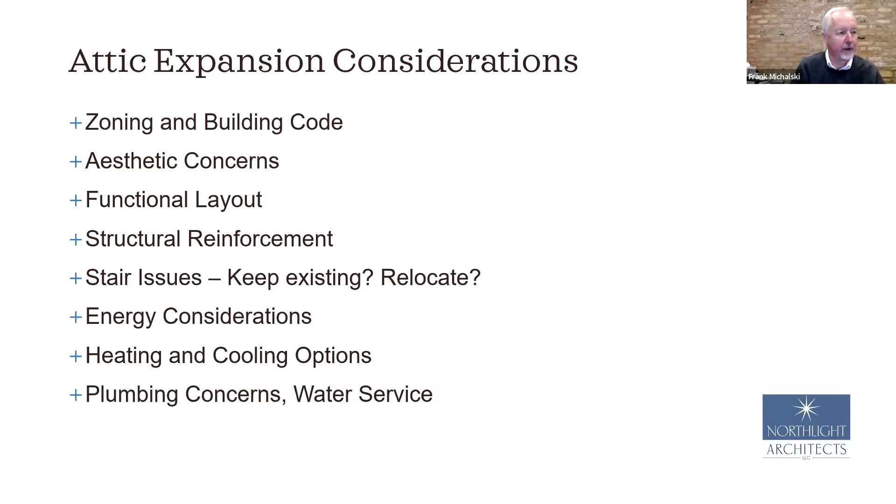So I'll get started with the zoning and building code. The way the city is set up is every lot and neighborhood is organized under a zoning district. Usually the bungalows are in RS3, RS2, sometimes RS1 district. And the districts have different requirements for the bulk, for how tall a building can be, how large it can be, side setbacks, etc., along with other considerations. But those are some of the things we're going to be looking at.

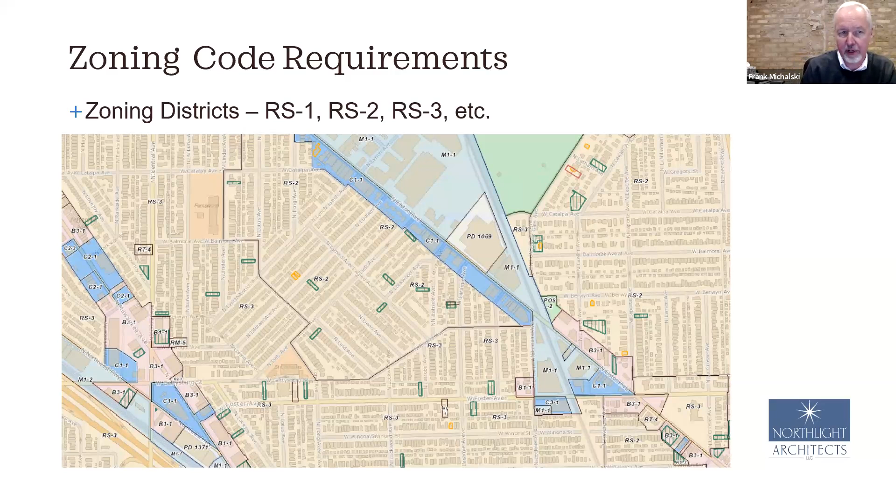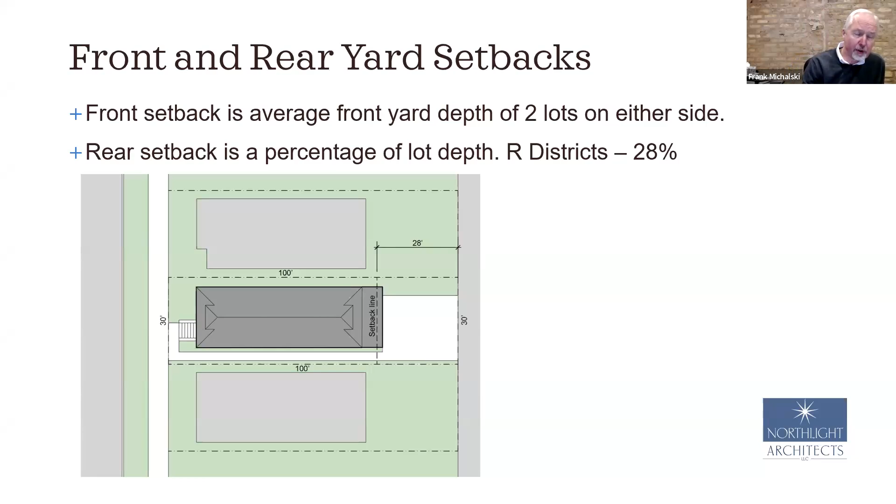Front setback, rear setback, side setbacks, that's also a ratio of the lot width and where the property lines are. There are kind of two limitations: one is the total side yard setback, and in an RS2 it's 30%, which was where this project is. And then there's also a minimum side yard setback that has to be adhered to.

And sometimes the existing bungalow that I'm working on is already existing non-conforming, already encroaching into those side yard setbacks. So either the addition has to be in from the exterior walls, or else we apply for a zoning relief, usually through the administrative adjustment process.

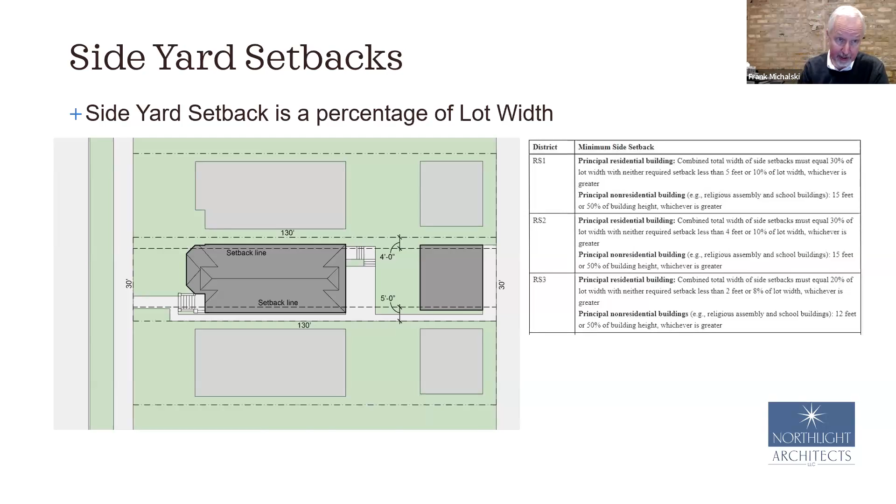Then there is what we architects refer to as FAR, floor area ratio. This is a percentage of your lot size. And again, I've got the chart on the three main zoning districts where the bungalows usually are. So the lower the district, the less amount you can build.

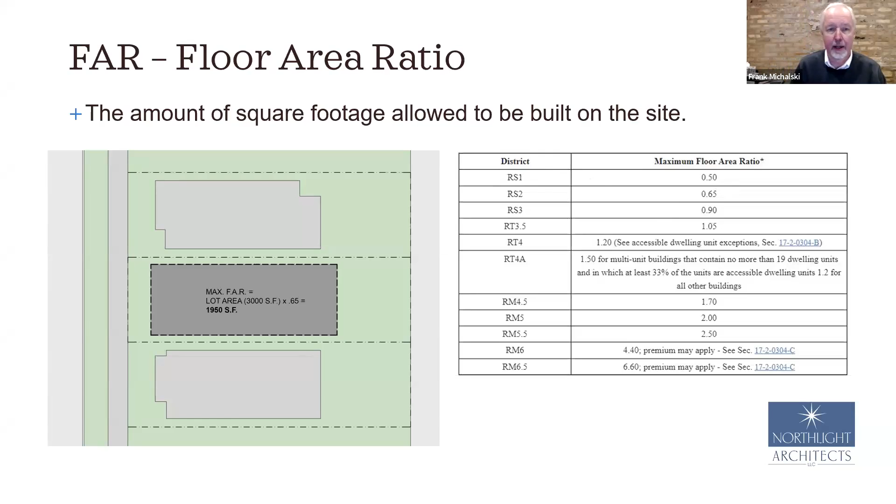However, usually in RS1 district, the lots are a larger size, but RS3 is 90%, RS2 is 65%. So that's another factor that can limit the size of the bungalow.

Just a little explanation of what counts in the floor area ratio. The square footage of the basement counts if more than 50% is above grade. So if the basement is more out of the ground than in it, it counts in the square footage, and it counts against you if you're trying to do a second floor addition and maximize your square footage. If it's more below grade, then it doesn't count.

If the ceiling height is 6'9" or less, it also doesn't count. And in attics, the only square footage that counts is where the ceiling height is 6'9" or more. So this extra space that you have, kind of your knee wall space, does not count in that floor area ratio. Just in case you're in a situation where you're in an RS1, you want to do a certain size addition, and you look at all these different factors which tell you how large it can be.

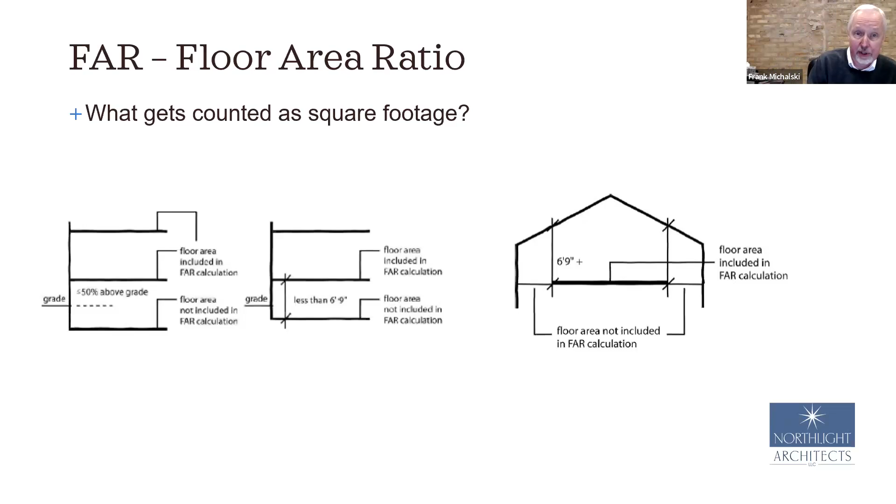Aside from the zoning code, which is one book, there is the building code, which was revised in 2019. This also has some limitations on building height and building area, though I find the zoning code usually controls that most. The building code deals with many things, but one of the important ones is the fire resistive requirements.

When a second floor addition is built, in this drawing on the left - I don't know how many of you can really understand this - this is like a cross section through the second floor addition, what we architects call the wall assembly. The wall construction has to meet a certain fire rating by a UL standard.

So this Table 601 tells us that if it's a 5A, which is like a typical wood frame construction, the exterior walls have to be 1 hour, the roof has to be 1 hour, with some exceptions. If it's 3A or B, which is usually a brick wall, these are the fire ratings for that. So when you're constructing your addition, you have to adhere to and meet these fire ratings.

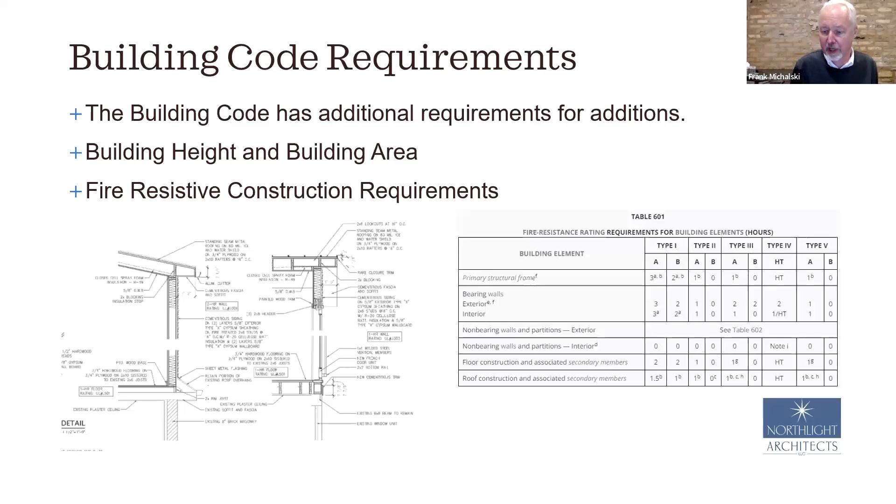Another thing that determines this fire rating or construction is how far the wall is away from the property line, and that is called the fire separation distance in the code. If it is less than 3 feet from the property line - so if you're building a second floor addition that is maybe 2.5 feet from the side property line - then that wall has to have a 2-hour rating. That means extra fire rated gypsum board or extra sheathing on the outside.

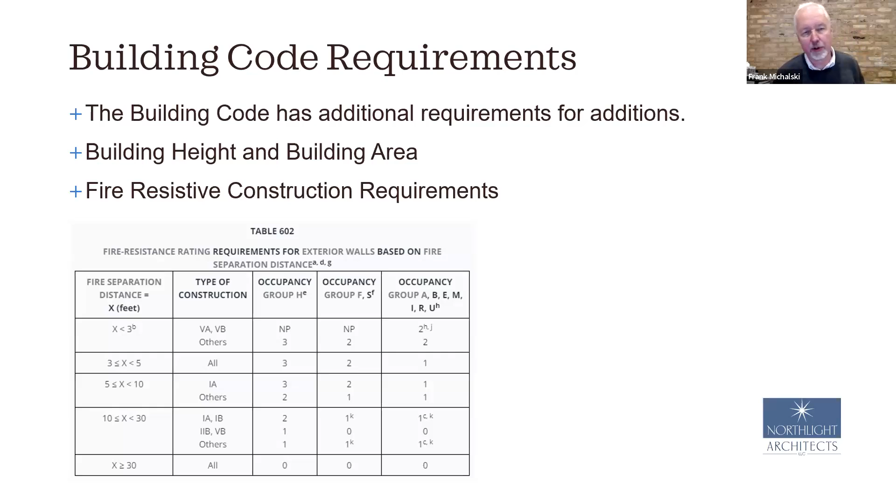And if it's within 3 and 5 feet, it's 1 hour. So all these code requirements all kind of happen at the same time, so as an architect, you have to look at them all and see which one controls your situation.

A part of the revised building code in 2019 had to do with the square footage of windows allowed. This was more in line with the international building code, which Chicago now is more aligned with. The international building code is more a national code.

So if, again, you're building maybe a second floor addition, and it just so happens that your existing building is less than 2 feet from your side property line, you can't have any windows. So if you wanted to have a bedroom here or something, you would maybe have to add operable skylights.

If it's between 2 feet and 3 feet, the code allows only 5% of windows, so it's not very much, but at least there would be some light and ventilation. If you are 3 feet or more from the side property line, which is more usual, you're allowed more square footage of windows, 25%. These two upper cases just occur sometimes in more hardship situations where the lot's very narrow or the existing building is wider, but it's another thing to be aware of.

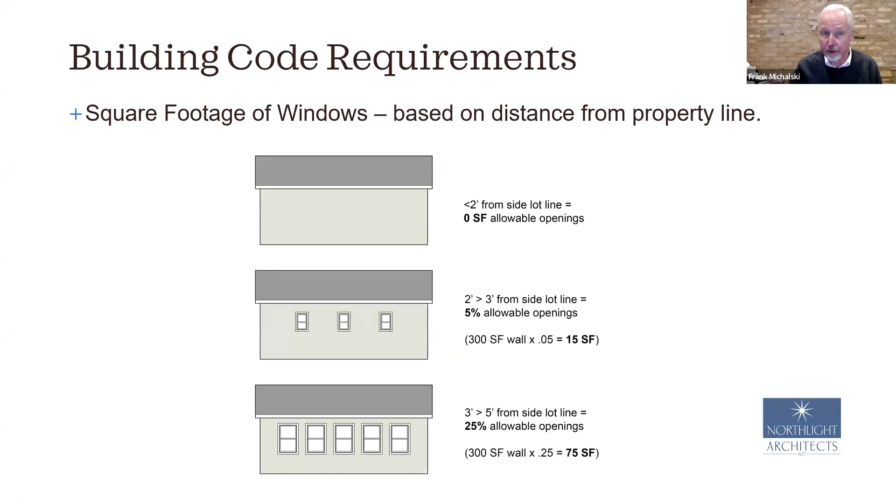So that's some code issues that will limit the size of your addition, how big it is, setbacks, etc. There's also the aesthetic concern, which is not so much governed by any codes, but just trying to keep the aesthetic of the bungalow in mind whenever you're doing an addition.

There are the Chicago Bungalow Association guidelines that are already in place that I always try to follow, where the additions are compatible in material, style, and proportions. If you're doing a second floor addition, try and have it set back 20 feet from the front so it doesn't intrude on the front part of the bungalow. Dormers and additions with matching roof pitch and height, window openings, trim, eaves and details, trying to have them match the existing building so the design blends together.

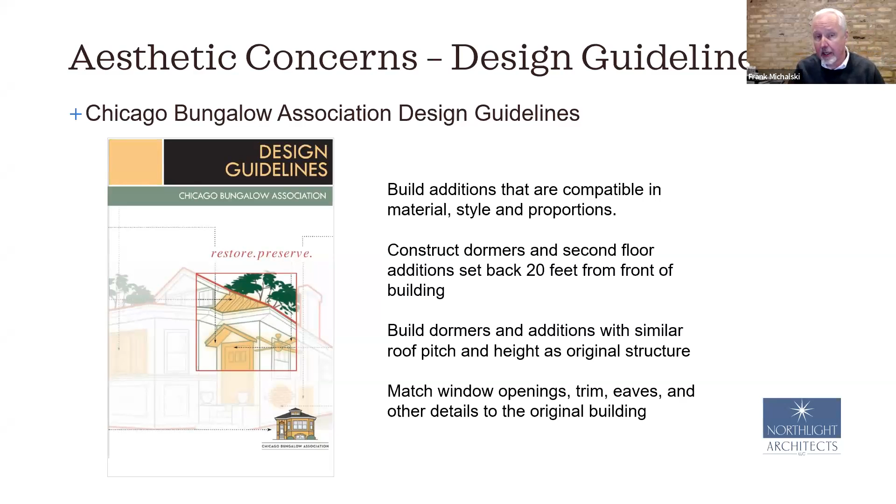So what I'm going to do now is run through some photos and examples of bungalows that either do meet the guidelines or that step outside of them, and just what that looks like.

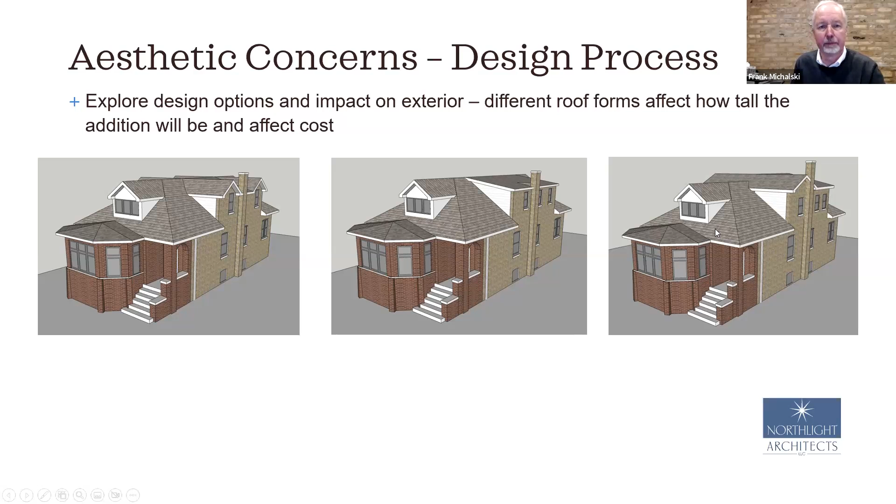A little bit of cost savings there, but it's always good to look at different options. On this third scheme, the roof is a little taller. It's nice if you can keep your roof line the same, but it's not always possible to get the proper ceiling height on the second floor. So sometimes the roof may have to pop up, but you try to mask it or have it work in a way so it doesn't detract from the impact of the original bungalow.

Here's another example. These three options aren't all that different, but it shows how this was a client I was working with who had a certain amount of square footage he needed. We could either do that as one rectangular form with a hip roof that matched the hip roof of the original building, or we could move one of the walls forward or back so you get a variation that breaks up this front hip.

You can also start to match certain details on the dormers. Here we slipped the wall like in the second scheme, but also added that. So each small change you make can impact the design in different ways. I always encourage everyone to look at as many options as possible.

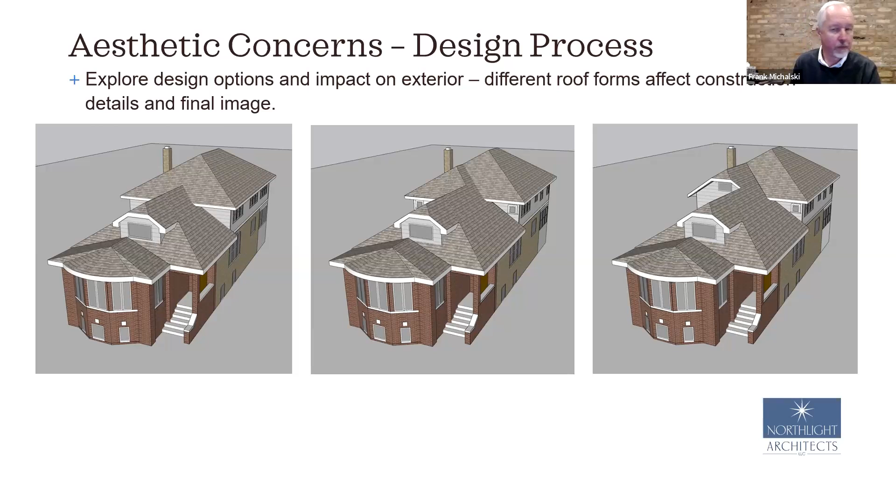Okay, so that's aesthetic concerns, which dealt with the outside and the appearance from the outside. I'd like to run through some projects I've worked on dealing with the inside of these bungalows and the functionality of the spaces. I see it's 6:30, so I'll try moving through these.

This project was a simple cross addition on the second floor. The first floor had stairs to the attic off of the kitchen, which took space away — I'll talk about stairs more later. In the renovation, we turned them into the dining room, closed that off so we could get more kitchen counter. On the second floor, originally the attic just had two bedrooms, a kind of open multi-purpose area, and a storage closet.

With the second floor addition, we were able to get a full ceiling height bathroom and full ceiling height closet with storage on each side. The bedrooms really stayed the same, though the finishes were upgraded.

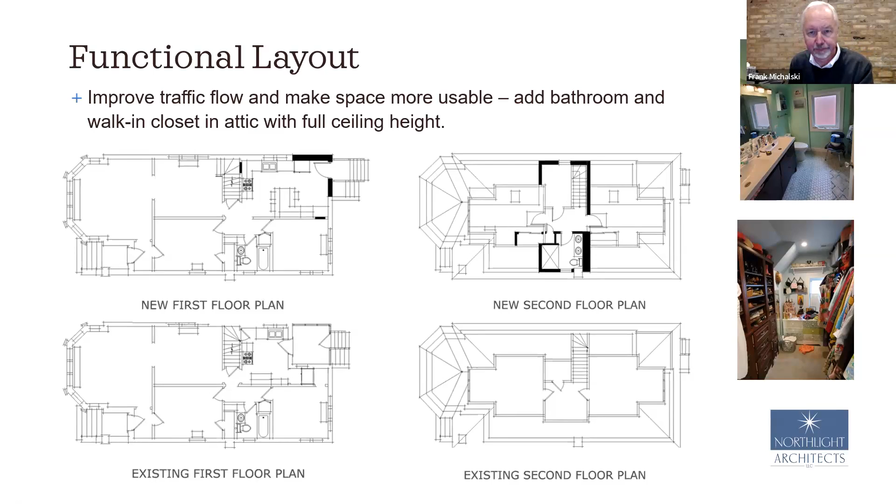This project had one of those bungalows where the stairs can be kind of confusing. There were stairs to the basement off of the front entry that were added later, so this whole front part of the first floor was really not usable. Then there were winder stairs going up to the attic with an open overlook area, which was somewhat interesting. But with these stairs here and these stairs here, plus a rear porch with stairs going up and down, it got complicated.

Sometimes you can consolidate your stairs, so we did a central stair, regained all of this space for living and dining, created a walk-in pantry off the kitchen, and kept the bathroom the same. On the second floor, it was just kind of a rough, raw attic space, and they wanted a master bedroom suite.

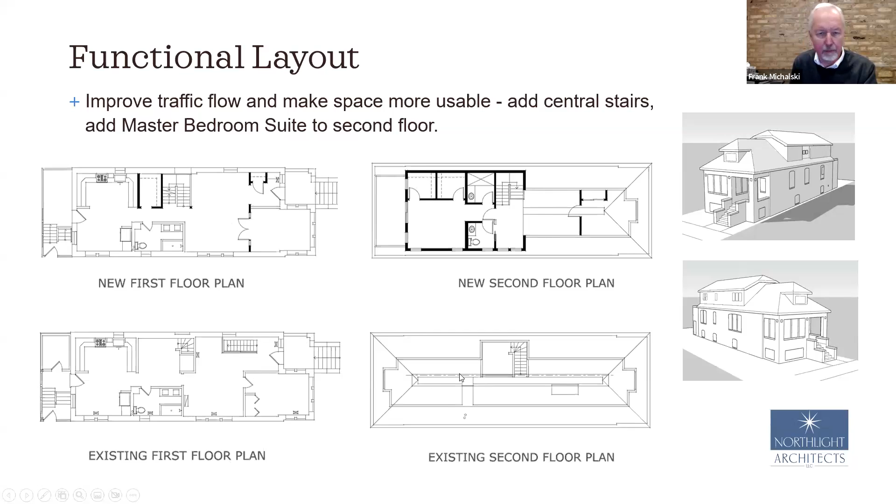There was a second bedroom, and we had a powder room that bedroom could use with just the toilet and sink. Then there was a more private shower and vanity for the master bedroom with his and her closets, and an open area in the front. So it was about cleaning up the stairs, getting more space, and having the bungalow function a little better.

And this bungalow, we're looking at floor plans, and hopefully everyone is comfortable enough, as architects we work with these all the time. But if it's hard to understand, you just have to try to see what the rooms are and what the use was originally and what the new use is.

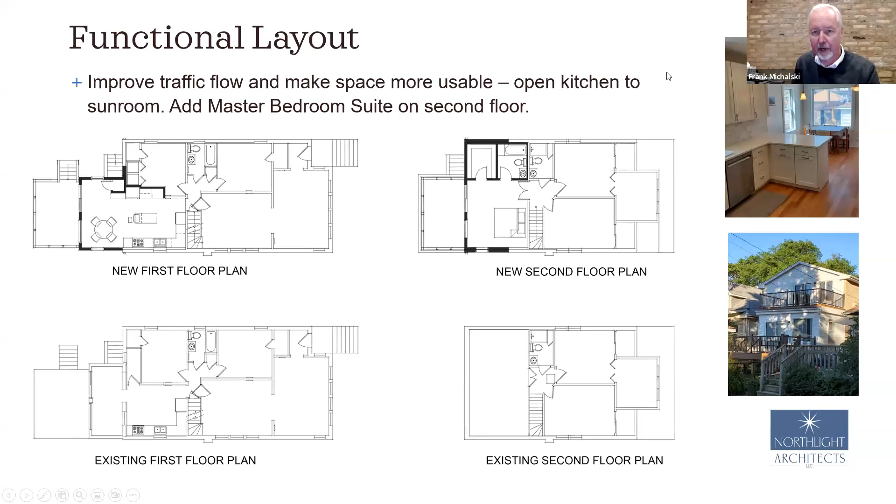I'll keep this moving. Here's another one that has the bungalow roof from front to back. Original bungalow, the kitchen again kind of isolated from the backyard. There was a room in this corner that may have been a bedroom when it was built, but it was being used as a family room, and again that was separated from the kitchen and the rest of the house.

So what the client did was remove this wall, install a beam, and create an open area, as you can see in this photo, from the kitchen to the family room and then an eating area. The front of the house was kept the same, the formal living, formal dining, formal sunroom.

Upstairs, there was a small dormer on the back and 2 bedrooms. There was a hallway running down the middle leading to attic storage. So the space was not really well utilized, only 1 bathroom.

The client expanded the dormer, as you can see in this photo, made it wider than the original one, and then added a master bath. This was tucked under the roof, and there was enough ceiling height to add a shower, a double vanity, and a master bedroom.

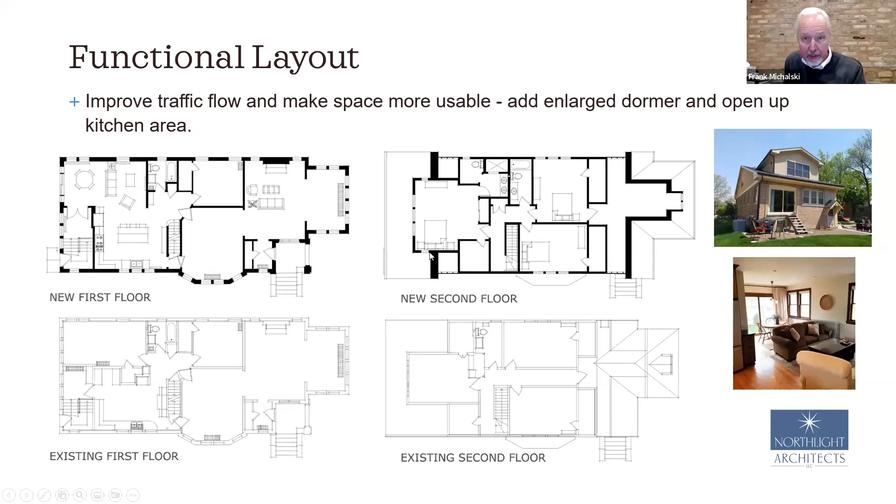Okay, so that was some internal functional changes that can happen when you're adding on to a second floor.

One thing that will come up is structural reinforcement, and this is a section through a building. So like a big knife is cut through your bungalow, and you can see your attic, your first floor, and your basement. Most of the time, the existing floor joists in the attic are 2x6s, which are not adequate to meet the current building code for either the loads in the bedrooms, or if the roof load is transferred down, the snow load.

So the original building works fine when this is just a storage area or raw attic, but when you're adding a second floor, there's a couple approaches, and there might be others. One is what we sometimes refer to as sistering a 2x10 joist, a deeper joist attached to the existing 2x6 to increase the strength.

Not always, but with some houses, this adds extra load to this wood beam and the posts in the basement. Sometimes that just needs to be reinforced, or some clients will replace it with a steel beam.

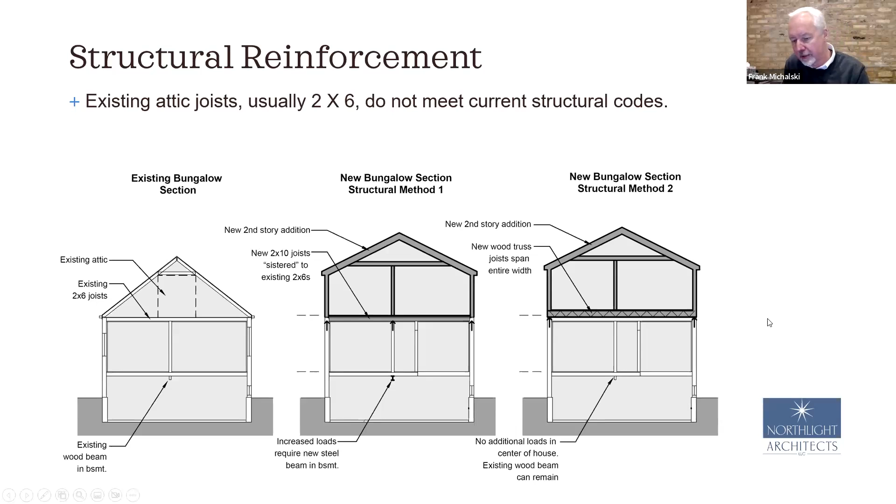There is another method using wood trusses, a structural element built up of small sections of wood, that can span from outside wall to outside wall, so there isn't any additional load on the middle of the building. The trusses allow space to run electrical and plumbing. So those are two approaches when you're doing a second floor addition, sometimes you have to go through this process. Of course, raising the floor also changes the stairs.

Another area that really needs reinforcement are the rear porch structures, depending on what their planned use is. This is a classic rear porch where the roof and the rear dormer is supported on the rear porch structure, but when you look underneath, it's just maybe a couple of wood beams and a couple of posts at the corner.

Sometimes this floor structure is like the attic 2x6s I referred to, sometimes it might be smaller lumber, or the spacing is greater. So again, this kind of framing is not going to meet the current building code, so it has to be reinforced or replaced.

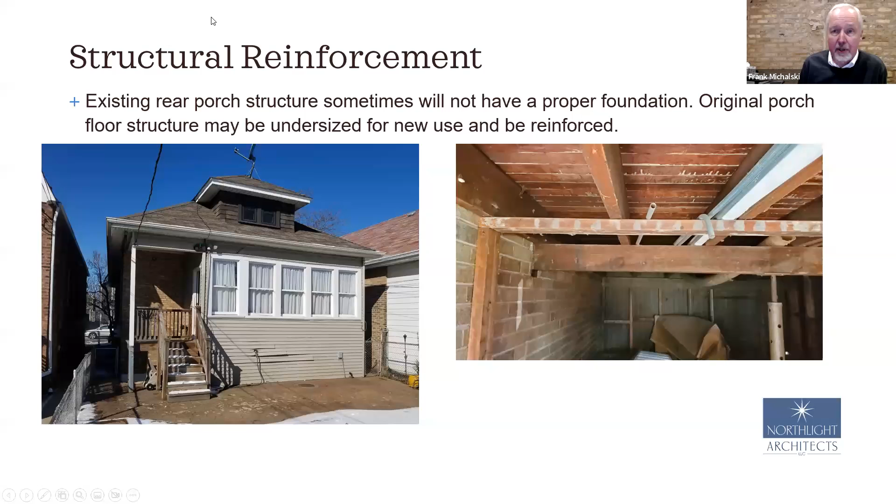And sometimes the porch—or in this case, this one-story bungalow—the porch structure isn't the right size for the roof rafters. There aren't really walls, just beams attached to the brick wall, with a post going down to maybe a post on the lower level, and what's infilling this are just some studs and a 1-inch wood paneling system. So it's not really a structure you can just insulate and finish, because it won't work with the codes.

So this was the example where we added the master bedroom suite on the back of the bungalow, and this was the new eating area and kitchen. The old porch structure was removed and a new concrete foundation was poured, so all of this meets current codes. It's sound construction, can be insulated properly, and it's a good structure.

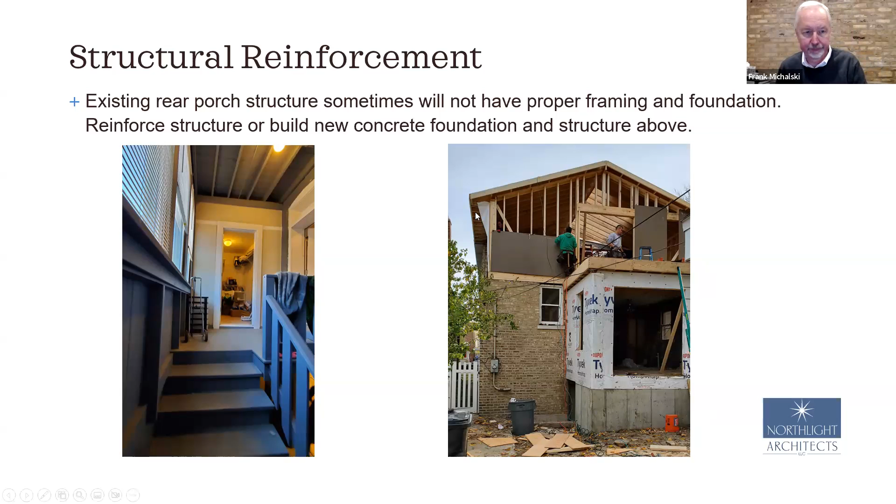Moving along with stairs, I'll try to go through this quickly. Stairs are another problem some of my clients have, where they're too steep—some stairs from the kitchen to the attic are almost like walking up a ladder.

Building code requirements: a tread minimum of 9 inches—10 inches is maybe more comfortable, but in Chicago you can go down to 9—a riser maximum of 8 inches, nicer if it's maybe 7 or 7.5, but in Chicago you can go up to 8, and stairs should be 36 inches wide.

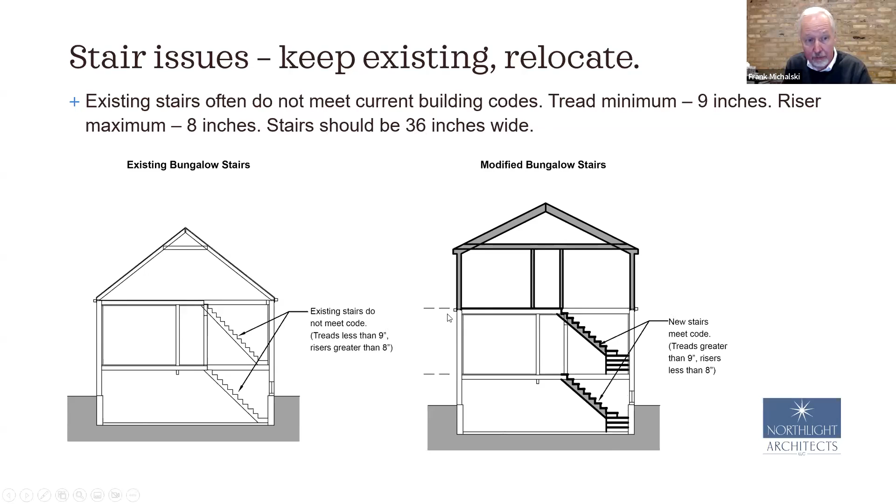So many times the existing stairs don't meet these requirements at all, and they either need to be totally replaced or changed somehow—sometimes that means adding more winders and more stairs, especially if we're changing the structure of the second floor. Here's a couple examples.

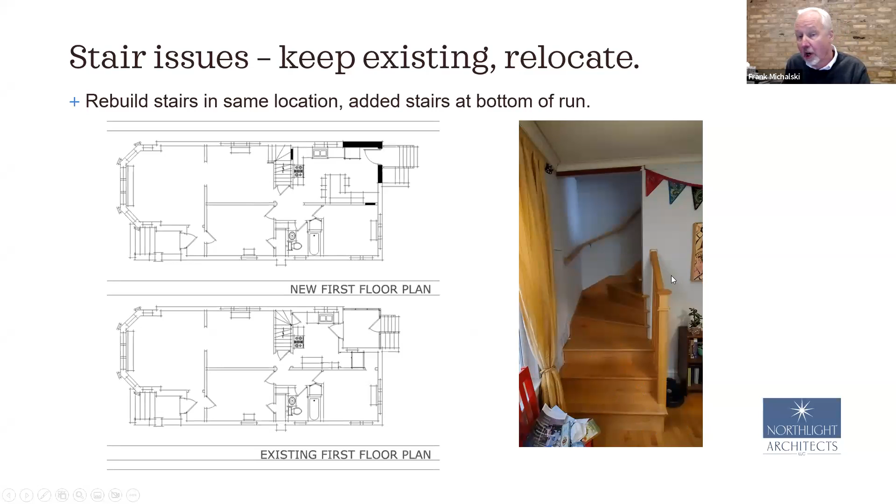This was a project we talked about before with the change of the stairs so they're not accessed from the kitchen, which increases the usage of the kitchen. Here's how it comes down into the dining room—it did extend 3 steps in, but I've since visited this house and the dining room table fits there and the family works with it. So these stairs do meet code, they're comfortable to go up and down, and they just extend into the dining room a bit.

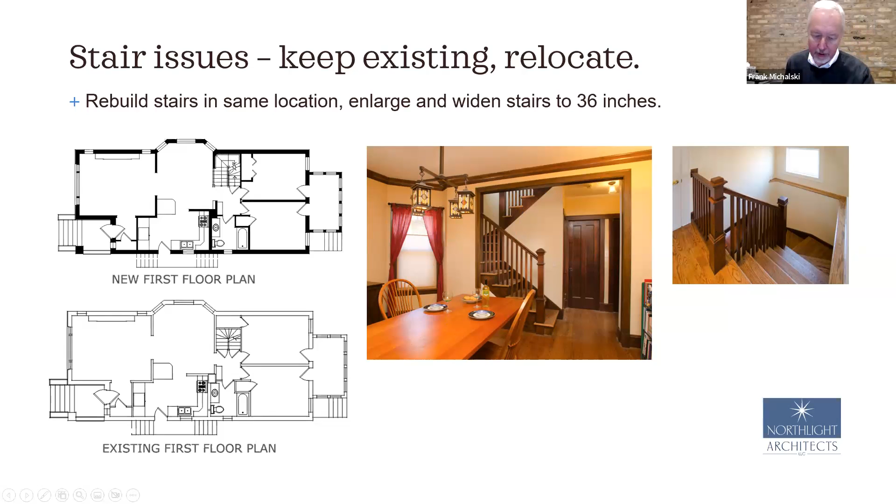This was a bungalow addition project, and sometimes it works out better to just totally relocate the stairs. This is one of these classic bungalows where in the kitchen there are 2 doors—one for stairs going up to the attic with winders and very narrow stairs, and one to go down to the basement. So all of this space is kind of not functional for the kitchen, and in reworking it, it's just in the wrong location.

So what we did for this client was relocate the stairs, creating a back stair hall so we could get a nice large kitchen, opening it up to the dining room and family room. We removed a portion of this brick wall and installed a steel beam so it was more open. I don't have photos of that, but I wanted to show the stair hall going up to the second floor.

This was a 2-bedroom home turned into a 3-bedroom, 2-bathroom layout, with a master bedroom suite and a hall bath. These are the new stairs going up, which meet code and provide a little bit of storage—there's a closet and some storage along the side.

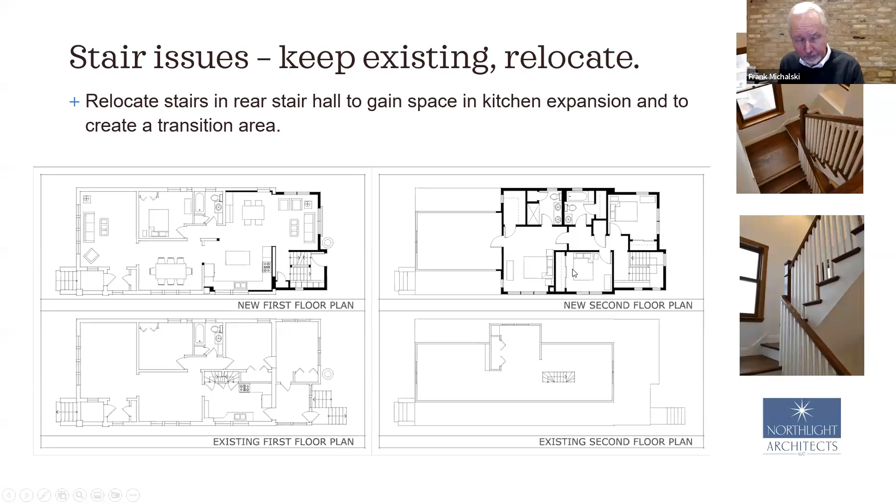So that's a stair issue. We're already at 6:45, but I'll make the rest quick.

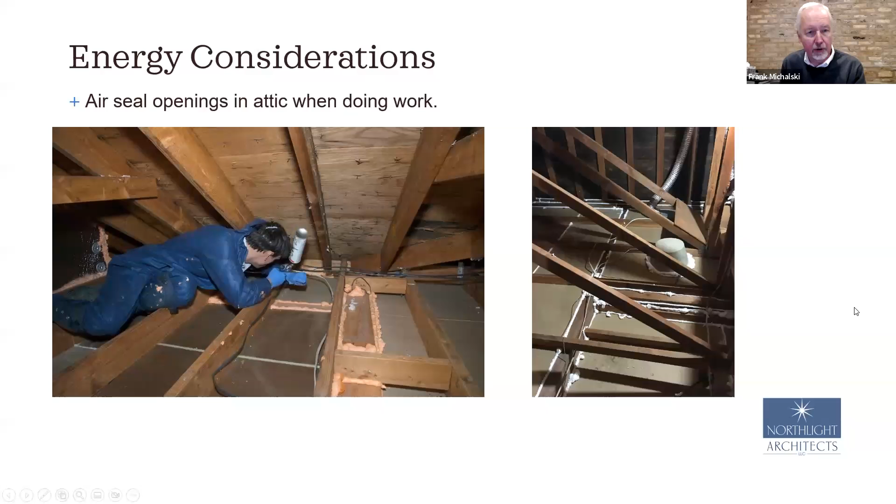When you're doing an attic renovation, it's always a great idea to consider energy. You can do some air sealing in the attic, where you seal up where the exterior wall meets the floor and the roof, around light fixtures, around openings, so you tighten up the energy usage.

Add insulation. If you're doing an addition, you would add insulation there, but you should also try to do it as much as possible in the rest of the existing attic—either spray insulation, which is shown in this photo, or batt insulation.

We talked about changing the structure of the floor joists. So if we're going to sister 2x10s to 2x6s, we're going to remove the floor, which gives an opportunity to install insulation at that floor connection. You can even go in and air seal and insulate on the first floor, if that makes sense with the project, to improve energy efficiency.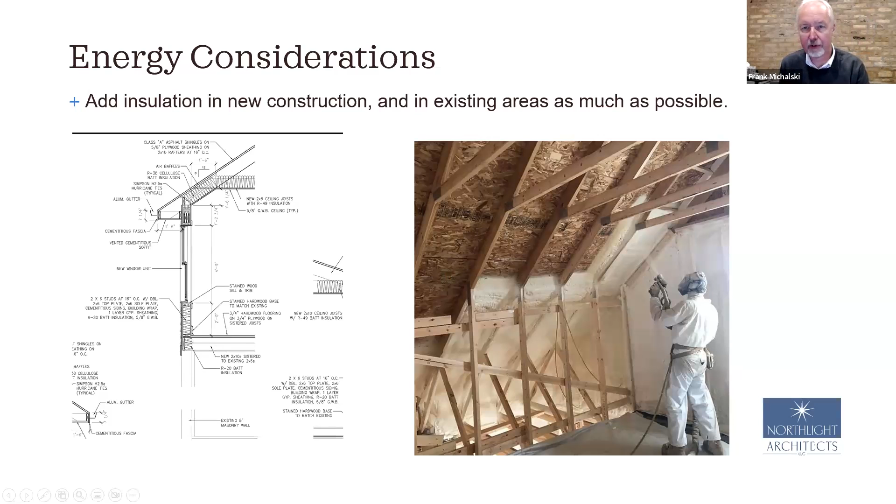And if you're doing a major project, it's a good idea to replace your existing furnace or boiler with a high efficiency type, or upgrade your hot water heater.

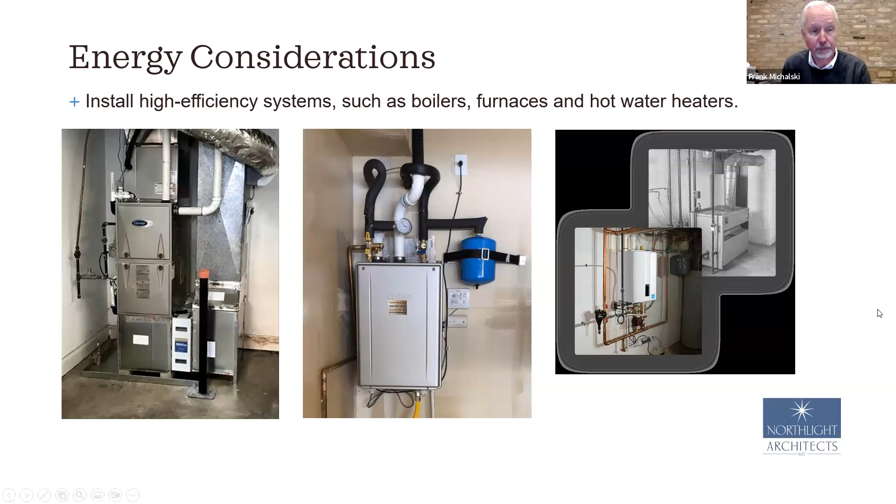Let's talk about heating and cooling a little bit. For bungalows, classic radiator heat—I like it, and I think some bungalow owners like it too. If you're doing a renovation project, you can keep the radiators, maybe upgrade or change out the existing boiler.

And if you're adding space on the second floor, you can just add new radiators, maybe with a larger boiler or a zoned boiler, so you can keep the radiant heat, which some clients like.

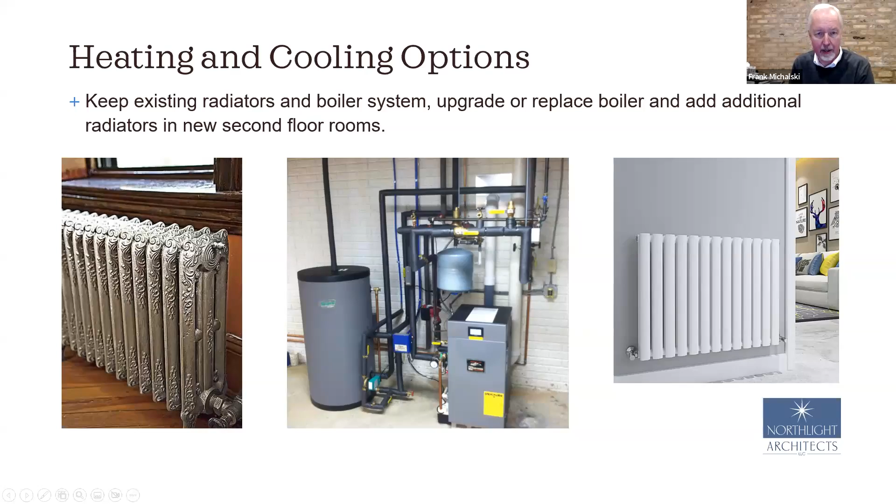Some of the bungalows have a forced air system instead of radiators. So if some of my clients are doing a second floor addition, they will install a second furnace up on the second floor, because the heating and cooling demands for a second floor, the first floor, and the basement are totally different.

In this bungalow addition example, we created a laundry room, furnace room, utility room, and then ran the ducts through the attic space above the ceiling, and even into the existing bedroom in the front, which we kept the same.

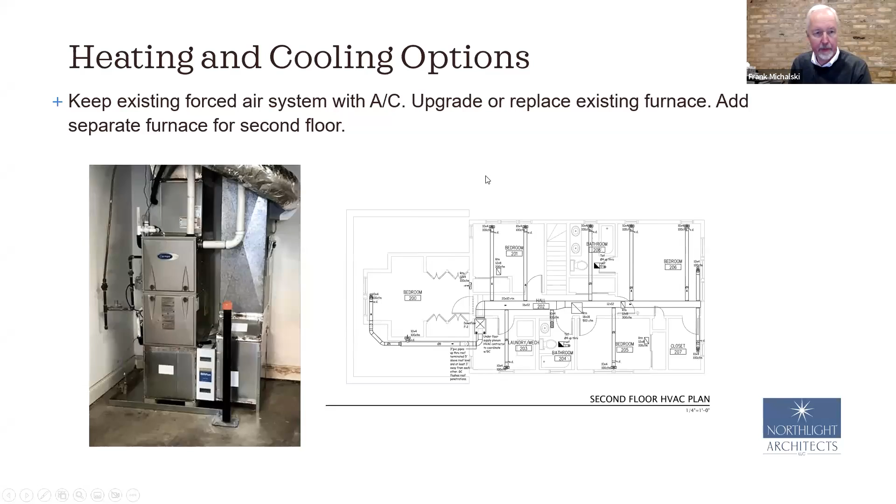Cooling can be an issue. I talked about the radiant heat system, which is a great option for heating. But this was the bungalow project where we changed the stairs and did the bathroom and storage closet, and we installed a SpacePak high velocity duct system, which you can see in this photo. The ducts are actually relatively small, 2 inches plus insulation, and they installed a SpacePak on the second floor, which then also cooled the first floor, which they never had before.

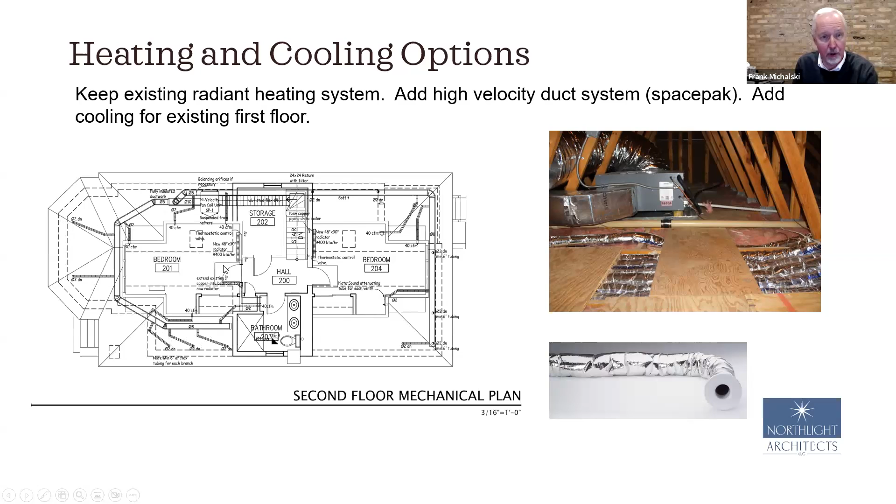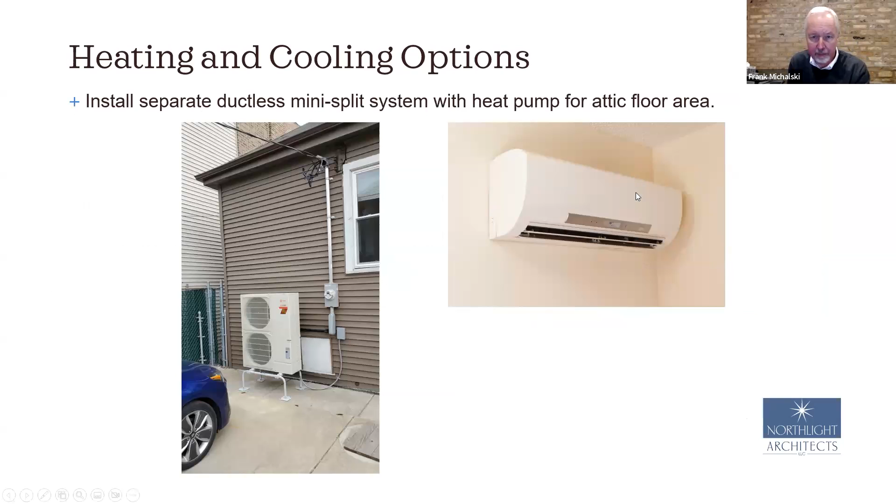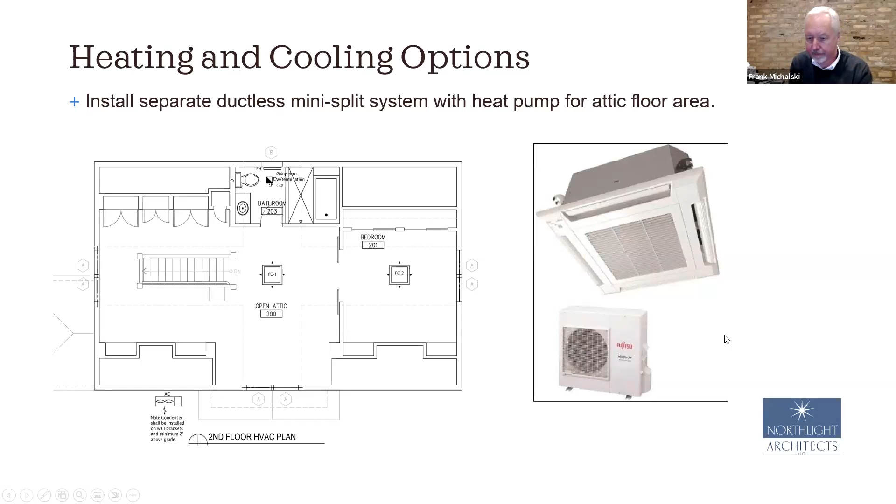There's also a mini split option out there with a heat pump. This is an example from a project a client did recently. Aside from these wall-mounted mini splits, I also worked on a project where we utilized units above the ceiling, and this is the heat pump outside.

Plumbing concerns, just real briefly, in laying out a lot of these bungalows on the second floor—I always try to put the new bathrooms directly above the first floor bathrooms, so the water and waste plumbing can just be connected.

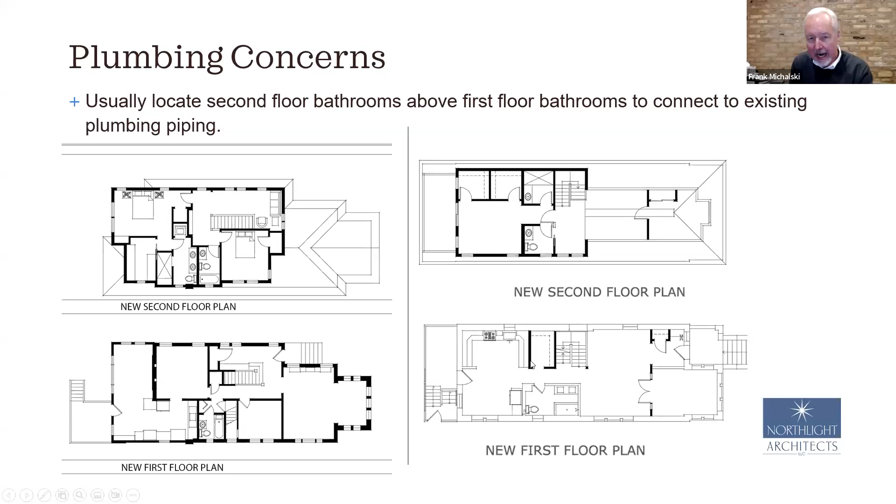Lastly, sometimes you may have to increase the size of your water service if you're adding, especially if you're doing a master and a hall bath on the second floor. As architects, we look at the plumbing fixture count—what you have, how much you're adding—and if it adds more capacity or demand than you have, then you have to increase that water service.

So I know that was more than 45 minutes—sorry about that, but I just wanted to get through everything. Those are many of the issues I deal with with my clients in attic additions. So I don't know if I should stop sharing.

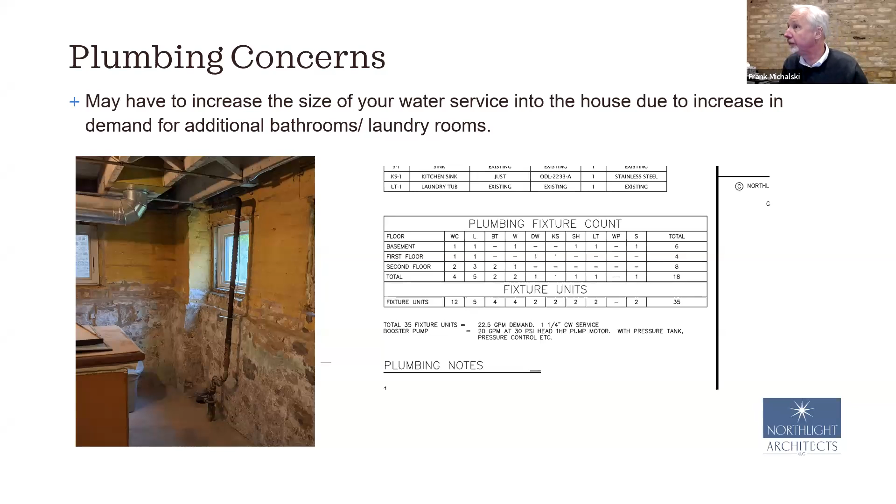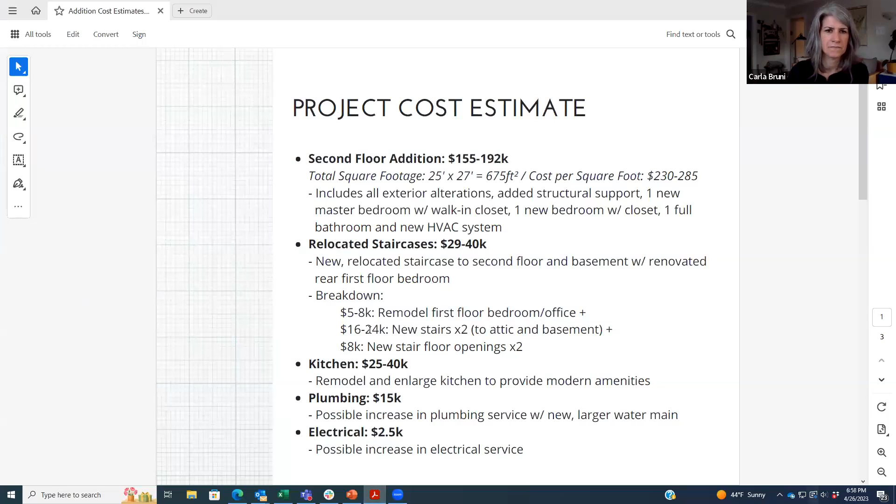Let me see if I can figure out how to get out of this. I kind of anticipated that a little bit, and it's very difficult to estimate cost, especially since the pandemic and supply chain problems.

But the thing you referred to that we did for the Bungalow Association, I think from 2018, had some good cost information, where a second floor addition at that time was 155, almost 200,000, and then cost for the relocated staircase, kitchen, plumbing, electrical - that's why it's always difficult, because it depends on how much other work is being done. But you can see this is one example where it's going to be over 200,000, I believe.

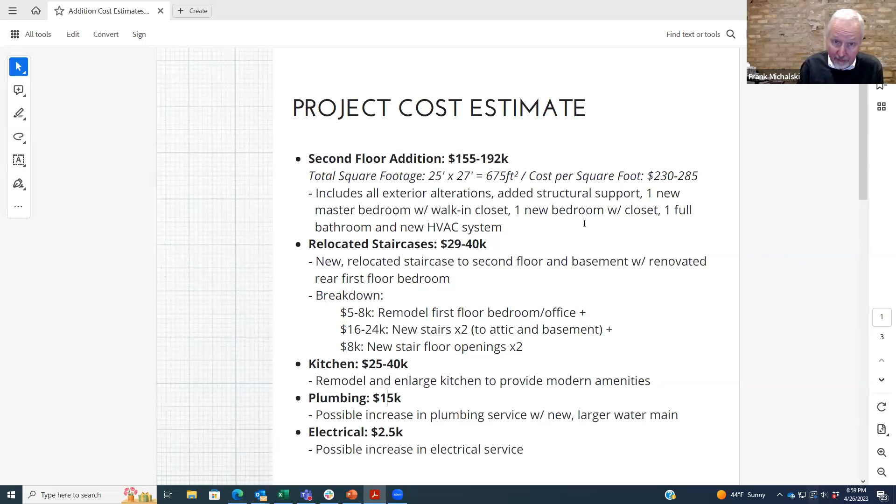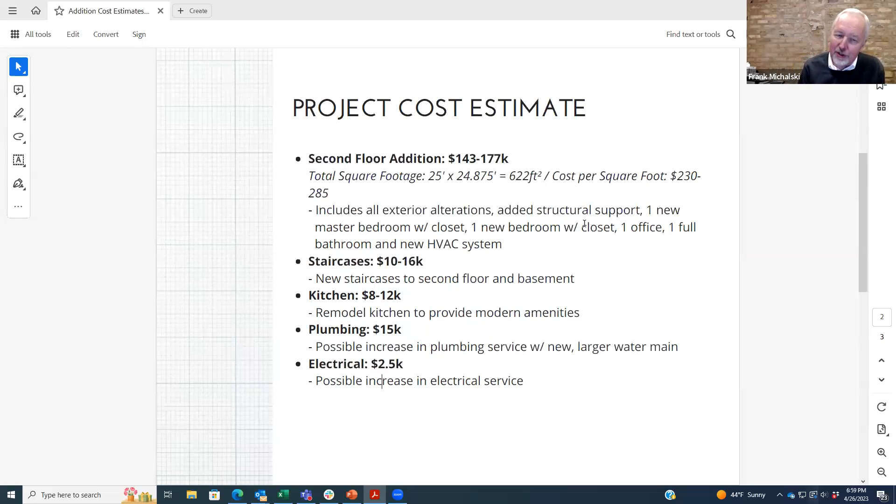And this was another one - I don't have these examples, but there were two different second floor additions. I think what I'm getting at is that we're in the 200 plus range, maybe 250. And let's see, this was one for just a dormer addition, which I didn't exactly show, but even that was at that time 153 to 185.

I don't want to do this. I think that the cost of these things are north of 200, maybe 250. And that's just what's involved.

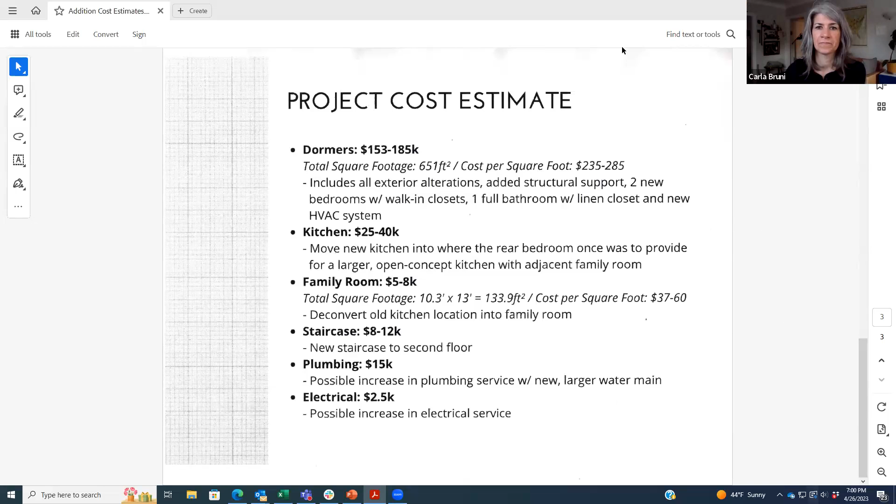What if there currently isn't access to the attic? If there currently isn't access, I don't know how much space they have up there, but you would just have to create that. You'd have to add an opening, add stairs, and find the best spot in your floor plan to add some stairs so you could access it—opening up that little hatch to expand it.

With the wooden truss structural method, do you have to tear the roof off, or can you add to an existing completely unfinished attic? With the wood truss option, you pretty much have to remove the roof to get that new structure in. Depending on how the roof rafters meet the exterior wall, adding the roof trusses often leaves no room to fit them in, because they have to bear on either the brick wall or the frame wall on the first floor, and that roof is usually in conflict with it, so the roof would probably have to be removed.